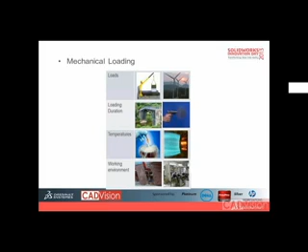This is a more complex phenomena - maybe a temperature cycle, chemical cycle, or even a moisture cycle, that sort of thing. So the same thing between all of them is that they are cyclic. It's a kind of cyclic loading that as this cyclic loading continues, the material property changes with time.

So that at certain point it could not resist the loading anymore and it fails. This is the definition from ASTM, American Society for Testing and Materials: the process of progressive localized permanent structure change occurring in a material subject to condition that produces fluctuating stress and strain at some point that culminates in crack or complete fracture after a number of fluctuations. This is how we define fatigue.

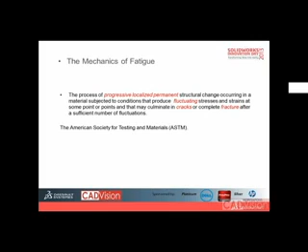So at the meantime, this is quite a long word, so I highlight some of the words. The same principle will be applied in SolidWorks simulation. These are the keywords: progressive, localized, permanent, fluctuating, cracks or fracture. So we'll see how it forms now.

So this is typically a cutting - what we see when a fatigue occurs, a fatigue fracture occurs. So at the beginning, we see a little scratching, little micro cracks. Usually this is from metals, right? For some other materials, plastic, the crack might be, sorry, for example like the concrete, the crack might be formed inside, not on the surface. But anyway, let's talk about metal first.

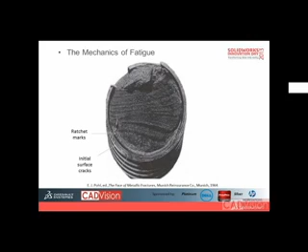So the micro cracks, after repeating cycles, form quite a lot of surface cracks on the surface, and what happens is they start to extend in the middle. We call it ratchet marks, and after a period of time again, suddenly they combine together, and we have this kind of beach mark, some sort of wave forming along the thing.

At this stage the crack grows faster and faster, and finally we see something that is not really nice to see - that is the final fracture region. This is typically the last section where the part fractures. So we see some sort of coarse surface there.

Okay, actually, as we can see from this crack formation illustration, we can see that fatigue actually is a very long process. It's not necessarily the last loading that creates the fracture, but actually the accumulation of the load along the usage of the product.

So this could actually be prevented if we do some analysis on the part at the beginning, so we can find out where is the origin of the fatigue point. We can take some issue on that - either we do some heat treatment or we change the design, anything we can do just to make sure that the first initial surface crack does not happen.

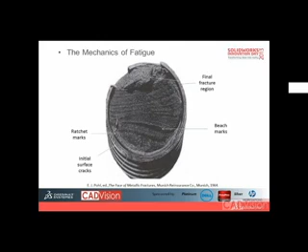So actually the fatigue theory has been quite well formalized. There's a German scientist called August Wöhler that first raised the theories of fatigue. Since now we're still using his approach to tackle a few things - he raised up the stress life approach, which basically means that the stress we face in the product is directly linked with life. And then we also have the strain life approach - it correlates the strain to the life of the product. And then we also have, this is quite a more modern one, it's called linear elastic fracture mechanics.

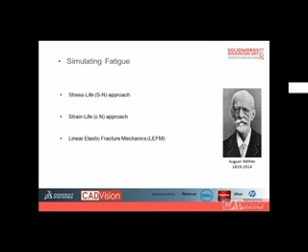So here are some helpful tips for running a fatigue study in simulation and also in real practice. Failure because of fatigue is the most common form of mechanical failure.

Fatigue as a good practice should be included in the design process to give confidence on product warranty, and simulation should be backed up with physical testing whenever possible. This is especially true for the first few stages, which I will explain later regarding the factors that affect fatigue. So don't rely on safety factors alone when it comes to fatigue.

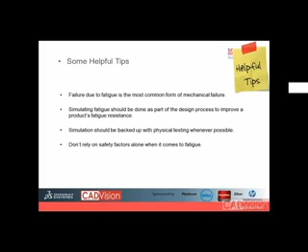Safety factor is the term we typically use in linear study. We have the safety factor plot, used in a linear static study, where we try to determine whether under a single loading, the region is okay. When talking about fatigue, we have to look at both together - whether under single loading it's okay, or under a period of time, that is fatigue, is it okay.

Here we see what kind of loading we support in SolidWorks simulation. The first is constant amplitude, on the left hand side, where we see a sine cosine wave kind of loading and unloading, or even reverse loading and compression. On the other side, there's a more random curve, which we call variable amplitude. In this presentation, we will briefly go through both.

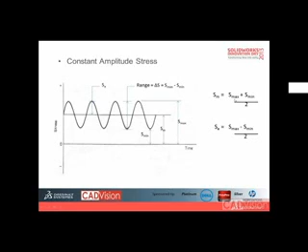This brings us to loading events. In simulation fatigue study, we have different types of loading events. For example, zero-based, reverse, or fully reverse, denoted by R. When R equals -1, we say it is fully reverse. When R equals 0, we say it is zero-based. When R is -1, that means the mean is on the zero line.

Assume the mean comes down to this line. Basically the part is facing, let's say tension loading, and then the test will come back to compression - tension and compression, tension and compression. If it's zero-based, the minimum is touching the zero line, which means if I have a loading, I start from zero. If it's a compression load, I start compress and not compress, start compress, not compress, start compress and not compress. So basically this is the difference.

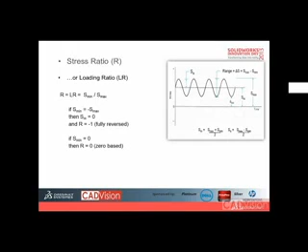We can define more ratios, but these are the two classical loading events, or loading ratios in our simulation terms. In mechanical terms, we sometimes call it the stress ratio. Let's have a look at the examples.

This is a trailer tow bar, used behind a trailer, a big truck or anything. Typically we see this little ball shape - sometimes we can see it in our car too, if you have one installed. I hope we never use it. So this is actually a customer case in the automotive industry.

There's a standard we have to fulfill, called ECE R5.5, section 01. What we do is perform fatigue tests according to the standard. It's straightforward - we have a load force of around 6.5 kilonewton, at 15 degrees at the tow ball, and the event should be defined as fully reverse. The part should be designed to last at least 2 million cycles.

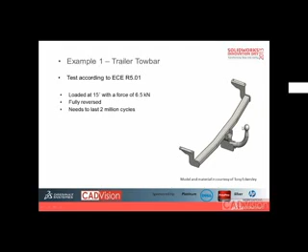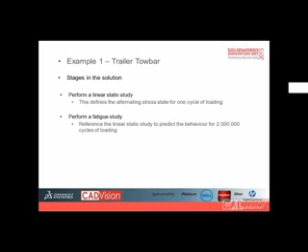So how do we start first? Do we go straight into fatigue? Not really. Usually we perform a linear static study first, and then define a fatigue study. We do the linear study first to make sure the design does not yield at the first instance, because if it yields at the first cycle, it's not meaningful to perform a cyclic study, as the performance could be very unpredictable. So we always go with linear study first - this is what we do in linear study.

So I believe you all have a clue on FEA study, or you have attended a class elsewhere. So basically, this is what we do.

First, we observe the symmetric conditions, so we could cut down the model into half to save time and mesh, that sort of things. Next thing is we have the hinge joint, we define a hinge joint in the bolt hole.

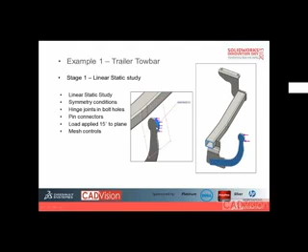Then we have pin connectors at this region, a pin. And then we apply loadings according to the standard, 15 degrees to the plane. And of course, we do some mesh control over here.

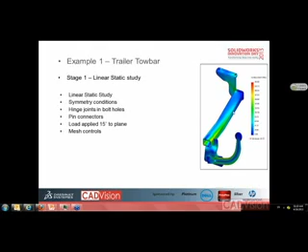So this is the result we have. Typically we can see if you set it to 250, the overall will looks okay. But we do see some red spots over several places. I will show you - okay, so these are the red spots.

If you do a factor of safety check of 1.4, this is the standard required 1.4, so we can see that overall is quite okay. However, we have some stress concentration area, so there are 3 very high areas where we can see.

So we have to determine whether this is mathematically concentrated or it is because of our structural design. So we look at the bolt hole - this is the hinge place where we set.

Here, because we set boundary condition as hinge, the simulation is formed using the rigid bar. So from the shape and region, we can determine this is a false alarm because of the very line contact, or that sort of thing creating the stress concentration.

So here also we have a very sharp corner, so it could be due to the modeling error. We forgot to add fillets or anything.

Because pressure is equal to force divided by area, so if the area is small, then it will be high. And then this area is supposed to be a load sharing area, so the area is very small, that's why the pressure is very high also. So this could be a true alert - this corner needs to be paid attention.

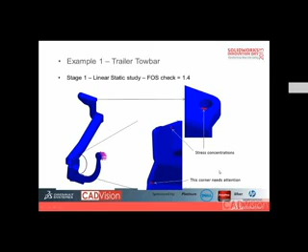So how to verify that in FEA, this sort of stress concentration - how do we verify whether we need to pay attention or we do not need to pay attention? It's very easily done, we call it a convergence study. So we just basically mesh more and more elements on that area.

For example, in this area, so we mesh more and more, we can build out a table. So we see as the mesh going up, our stress value also going up.

And then we use the stress value to plot a curve. The x-axis is DOF, the y-axis is the maximum stress. We can see the stress value actually going up, and it shows a convergent behavior. So this is a place that needs attention.

For the other 2 places, we probably will see singularity - that is, the curve actually diverging. It goes up to sky numbers as the mesh goes smaller and smaller. So there's a false alarm there, but here we need to pay attention on this one.

Since we already have this place already yield around, they converge around 550, actually there's no need to continue to fatigue. So as the first cycle - the fatigue is for 2,000,000 of cycles, but at the first cycles, this part already yields. So there's really no point of going ahead before we make some design change.

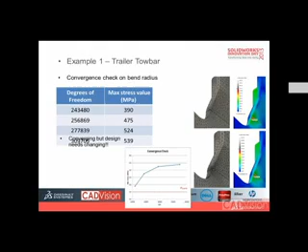So typically we design this place for a more load sharing event, a load sharing curvature, so that basically it could reduce the share - I mean, transfer some loadings towards other parts so that it reduces out.

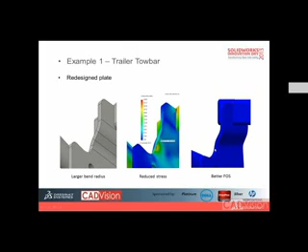So on the same check, you see that it passed the check of 1.4. So when it passes everything, the criteria is in linear static, so we can continue to fatigue. Linear static is basically a kind of gut check to decide whether we want to continue fatigue or not.

So here comes how it took quite a while for us to go to fatigue. Okay, but here we go - a fatigue study, so it is inside here.

This is quite an interface of fatigue. It's a separate module where we can define a fatigue study. This is rather simple settings we can see compared to linear statics. There are only parameters, loadings, result options. So this is the loading, what we

discussed just now about the loading events. Here we see fully reversed, blah blah blah, how many cycles we want to determine, and what kind of study we are referring to. This study is referring to linear statics. So basically, a fatigue study is based on the previous study.

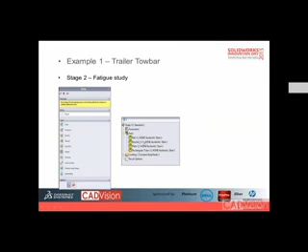Either it's a linear study, thermal stress, or non-linear study. Basically we just base it on the result of one cycle, and with material property determine what is the final fatigue result. So we have material over here - they are all steels. Typically for fatigue study, we need a curve that we call SN curve. So this is the SN curve, what we see SN curve is here.

So this is the input where we put real numbers. In the study, we see we use logarithm numbers, or we do some testing, we have logarithm numbers. So basically we do some conversion, converting back from the logarithm, okay, back to the real state.

So this is a very easy conversion, so I will not spend too much time. Just put in as much data points as possible, usually at least 7, but put in as much as possible.

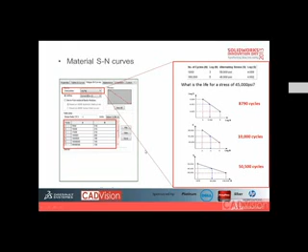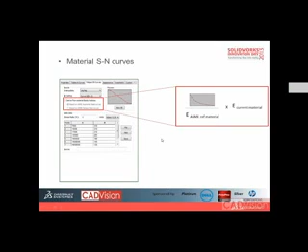So we just pick some important points and convert inside on a logarithm basis. So this is the stress ratio. This is how we test the part, how we obtain the S-N curve from a real test, we define it here. And if the test data is not available, which is most likely the case, we can choose to derive from...

the ASME curve, either it's austenitic steel or carbon steel. So what it does is, based on the elastic modulus of the material and the current material, do some conversion based on the known curve.

So for steel, it is still okay. For metal, it's fairly accurate. And for other materials, if fatigue is really a concern of the product design, and we will perform more similar tests in the future, it's worthwhile to send the material to the lab and get an S-N curve for better correlation or better result accuracy.

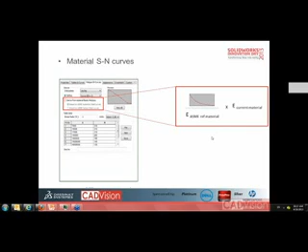So this is the material data typically what we get under the experiment test. This slide shows some of the critical points we have to take care of. When the slope is changing, this is a typical error - we should put in more data points for better interpretation of the curve.

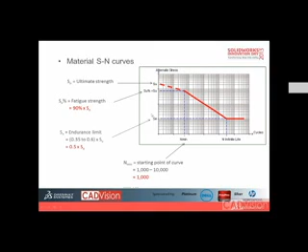This is based on percentage, and here is based on logarithm, and we call this the endurance limit.

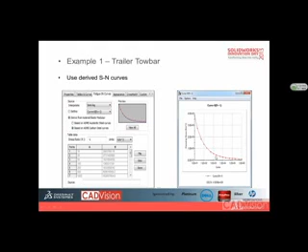So this is a derived curve where we see this is derived using ASME carbon steel, since the experimental test is not available. So these are the two results that the fatigue analysis will give us - one is the life plot, and the other is the damage plot. The life plot is typically how many cycles it will sustain before it yields or before it starts forming cracks.

To be precise, we should define it as it starts forming cracks rather than fatigue failure, because in the real world, fracture is more of a random, or should we say a normal distribution random event. So what we say here is that we have confidence that this place will crack at this time.

And for the damage plots, we can see where is the place that would be damaged - under the maximum life, where is the place that contributes the most damage.

Compared to the last design, we see that although we have improved in the linear static study, we still have this place and this place not up to standard, so basically we need to refine this place. It's quite interesting to see that it shows up quite well where we want to improve.

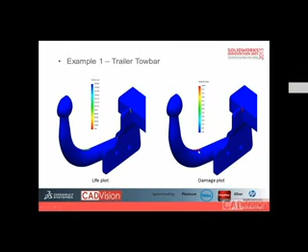We are pulling this thing, so the load is actually transferring throughout the place. It could be this region, but with the simulation tool we can precisely analyze what area we actually need to be concerned about.

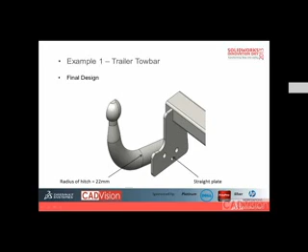So here we can see the changes we've made - we changed the radius of this, made it more thick, but we still made this slimmer. There's no need to improve here, but we improved here, and we slightly changed the orientation a little bit over here. So finally, all the things have passed through the factor of safety check.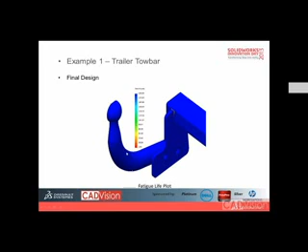Okay, so this is the final factor of safety. As usual, if we're not putting filters up, this could be a false alarm, so we focus here. Both are safe.

This is the study property where we come from fatigue. This is quite a big thing. From this example, we are computing the stress based on von Mises stress, which is quite a good failure criteria for metals. For others like stress intensity, Tresca, or maximum principal, it sometimes depends on different materials. We will choose different, but for steel, von Mises is quite good.

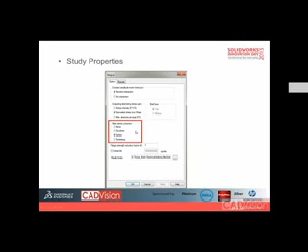This is a different correction term typically used in fatigue. Currently we support Goodman, Gerber, and Soderberg.

From this case study, I would like to raise some important points. Loading is separated into constant amplitude and variable amplitude. In example one, we showed constant amplitude. The second point is to try to use actual experimental fatigue data in design.

If we do this kind of analysis time to time, it's worthwhile to invest in it. However, when it's not available, you can use approximate estimation, but take note that we only pick from the SN curve available inside SolidWorks, and we pick a curve that is close to the material properties and material behavior.

Lastly, you have to recognize that the mean stress might be different between the real test and the load case, and we require some correction methods, which we will discuss later, to make the result as close as possible from the theoretical world to the practical world.

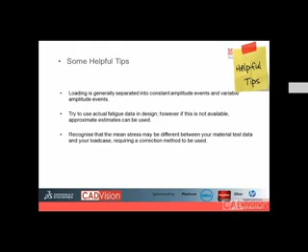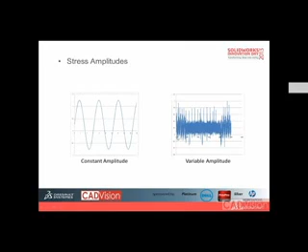On example 2, probably I'll just go through a bit due to time constraint. We'll just go through variable amplitude, so we can see what kind of variable amplitude this is. From example 2, this is a good example of variable amplitude.

This is a part in the steering connected to suspension or anything, so we have some loadings. If we do some real tests and put an accelerometer there, what we see is the load is quite random. However, we can still determine some peak load and bottom load. Some of the curve looks repeatable, so this is what we call variable amplitude events.

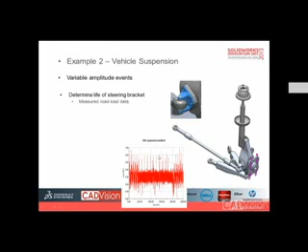The method of converting variable amplitude events into usable simulation input is called the rainflow method. We'll discuss this later. Let's have a look at the case first.

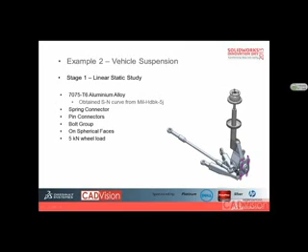The material we use here is aluminum alloy, and we use the SN curve from the military handbook. Here we have some connectors, and the condition is at this region, with another pin here. The loading is 5,000 Newtons along here.

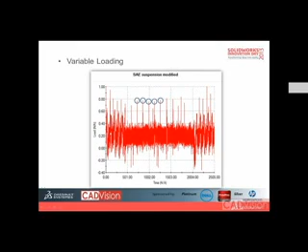This is the event response we collect during the test, and this is varying. So we can identify where the peak is. We will choose this as our testing event, assuming it's repeatable. This could be some interference during the testing, but we'll choose this region. This is the peak we have.

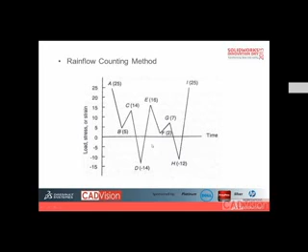This is the conversion - what we capture for a small portion of the event, and next is what we convert back into events, here and here. ADI you can see is ADI - these are the very extreme cases. For BCB it's not the extreme, but we still include it. It's called the rainflow counting method.

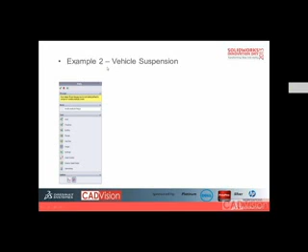Under here, okay, we have the same thing we have in the event. So I think okay, and the next one is here. So...

The curve and the loadings is actually quite a bit different than that. So let's see how we define the curve. Okay, so this is how we define the curve. We just put in as few points as possible.

For your information, what we can do is actually copy from Excel. So a better way to input so many curves is that we save the data, test data, everything into Excel, and we just copy over here.

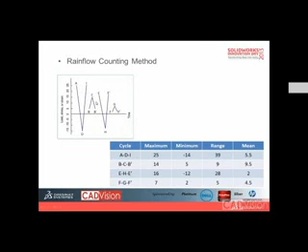Okay, 1 bin, 2 bins, 3 bins, 4 bins. So basically, it's up to us to adjust. It's similar to a mesh. This could also go to a kind of convergence.

The more bins we have, the closer we are to the actual data from the rainflow loadings, so we can say it's more accurate. However, this will affect the time to calculate and solve the results. So we typically test it out on a well-developed product, and we find out what's the best bin number for different products. Basically this is case-to-case. We have to run a field study for the first time to find out what is the correct bin number for a product.

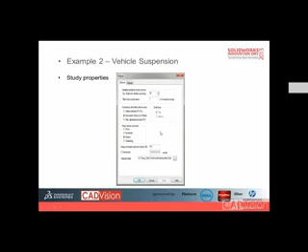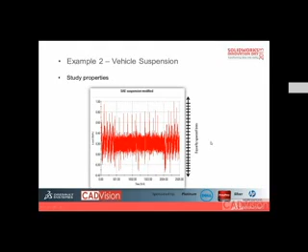So this is a loading, we already went through this. This is the loading, so we just check on this. So this is the bin number. Okay, so this is...

Okay, this is the other factors we're talking about. It's called the reduction factor. These are a few factors that would make a difference between the theoretical world and the practical world.

So the stress condition under vacuum and air could be different. The difference could be slight, could be little. In the vacuum state, we can say we have a higher SN curve. In the air environment, we have a lower one. Okay, so this is even worse: fresh water.

If we do some moisture test or anything, this could be lower. And if there's some chemical effects, that is even worse. So typically we have to correlate with the use environment and apply some reduction factors.

Because what we use to determine the fatigue is actually from experiment. If we do some experiment that is, for example, under normal air conditions, so we get a fatigue curve. However, the application is used in some kind of moisture or chemical related environment. We can choose to input some factors to adjust our accuracy result.

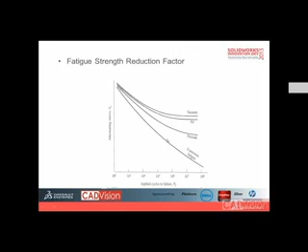Okay, so these are typically the factors that will affect our fatigue. So KC stands for corrosion, and we have KM, the loading mode, KF frequency, K1 size factor, KT temperature, KR reliability, KN notch effects, and KF fretting.

So the top ones could be quite understandable. The bottom ones, for example size factor, reliability, notch effect, fretting, are more related to manufacturing. For example, if we have very tight quality control, then the size factor could be very close to 1. Okay, ideally everything could be close to 1. So if some of them have a negative effect, they will start reducing the life, they will be less than 1.

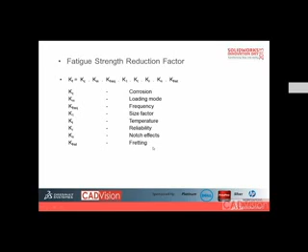Okay, so let's say we have bad control on the tolerance, then the size factor could be low. We have a not careful manufacturing process, for example we can get some scratches. If there's some damage during transport, blah blah blah, then we have to adjust the effect correspondingly.

Okay, so this is finally how we accumulate the fatigue strength reduction factor. In this case we choose 0.61 using a reference. Okay.

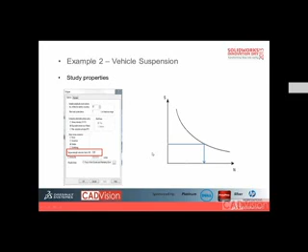So on this case study, we see for a factor of 1, which means a very ideal case where we don't have any problems in manufacturing, every part is perfect, we have 128,000 blocks. Blocks means repeating effects, repeat cycles, the curve that we input, the random cycles.

However, what we have here is bottom. If we add, considering the practical factors that we have discussed just now, we can see we have a lower cycles. So somebody might ask, how do we actually calculate the factors?

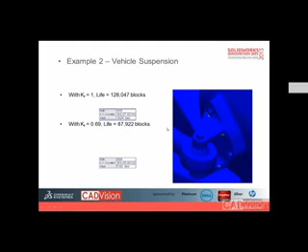Basically, it's quite a difficult task, quite a research task for you to build from scratch. But we could start by using some reference. In some standards or research papers, basically they will suggest some kind of factors that we should adjust, and then based on your product, we can adjust it time to time to make it more suited to your product. So for this automotive, we choose 0.69, which is commonly used in industry.

Okay, so this is typically what we have in the rainflow chart. Apart from the other result, this is the result we can have. Since the input is kind of statistic, the output is kind of statistics also. So if let's say this is a high stress event, if we have more of the high stress event, what is the corresponding lifetime of these issues count.

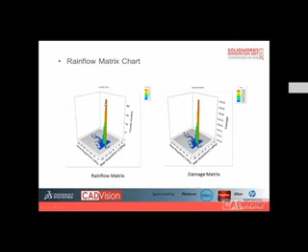Okay, as we are close to the end of presentation, this is the summary for example 2, variable amplitude events. So we got more points here, 4 points now.

The first is we have to try to obtain accurate service load history. And the second thing is remember the importance of notches in design, and try to provide a smooth stress gradient by designing streamlined features.

We also need to be aware that there are many factors that can improve the resistance of corrosion fatigue. This corresponds to chemical or that sort of factors. If that happens, this is some of the actions we could take to improve the factor as high as possible, such as shot peening, coating, cladding, painting, chemical inhibitors.

And then the last thing is don't ignore data scatter in fatigue testing. The load data can result in significant variation in predicting lifetime.

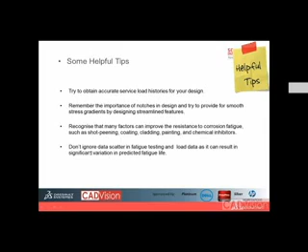So as a conclusion, let's make a brief summary for the whole presentation. We have discussed a common failure mechanism, which is fatigue, and we discussed the approach, which is the stress-life approach, the SN approach in simulation. And we have talked about different kinds of events, either constant or variable events.

From these two examples, I've shared with you 7 assumptions. The 3 points in example 1 and 4 points in example 2 basically develop into assumptions that we need to list out in our simulation reports. And the last point is verify with physical testing.